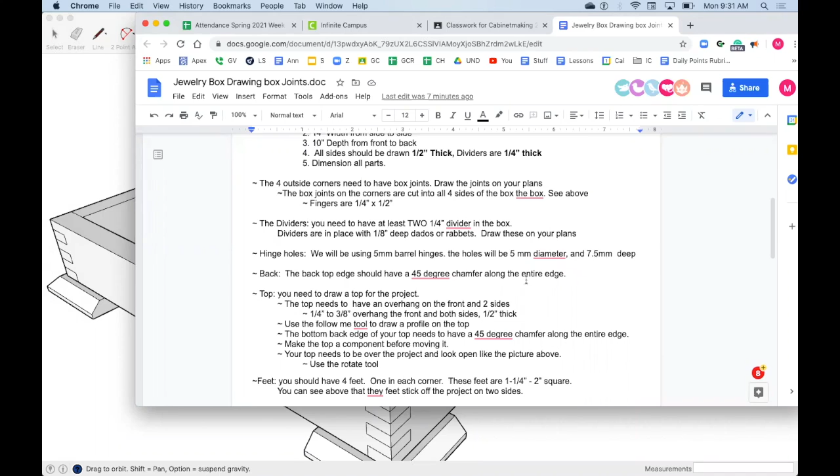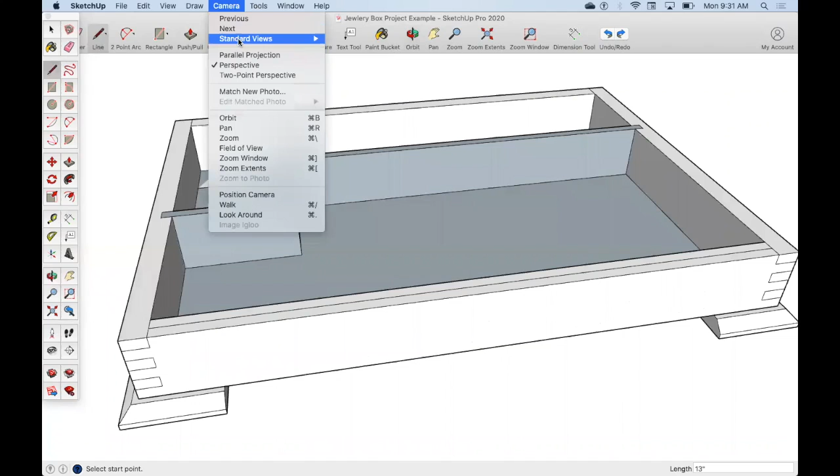So if we take a look at our box, we're going to decide where we want to draw. I've decided this is going to be my back. To start with, I'm just going to take a line across here to find center. Then I'm going to come in here right above, and you can go to camera standard view, that might help you out. I'm going to click top, and move over so I can see this here.

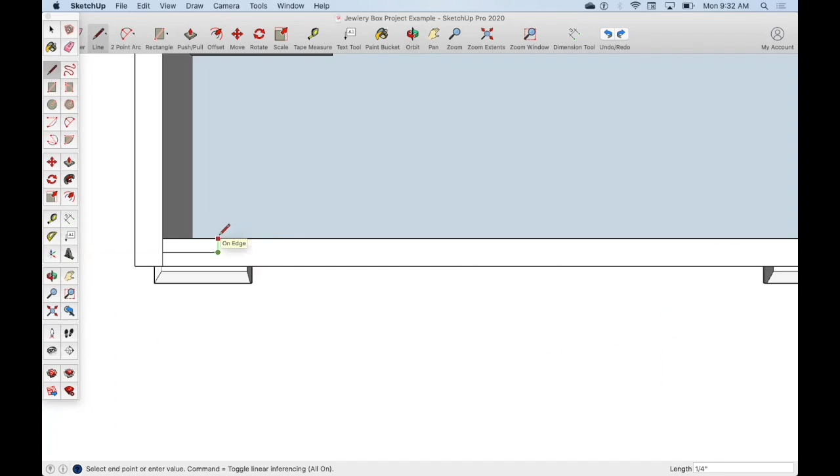Now, depending on where your dividers are, if you have a divider in the way, you'll want to move your hinge holes accordingly. So it doesn't matter how far. I'm going to come over 1 inch from that inside edge. And then I'm going to come up all the way to the edge there. So this is going to be the center of my hole.

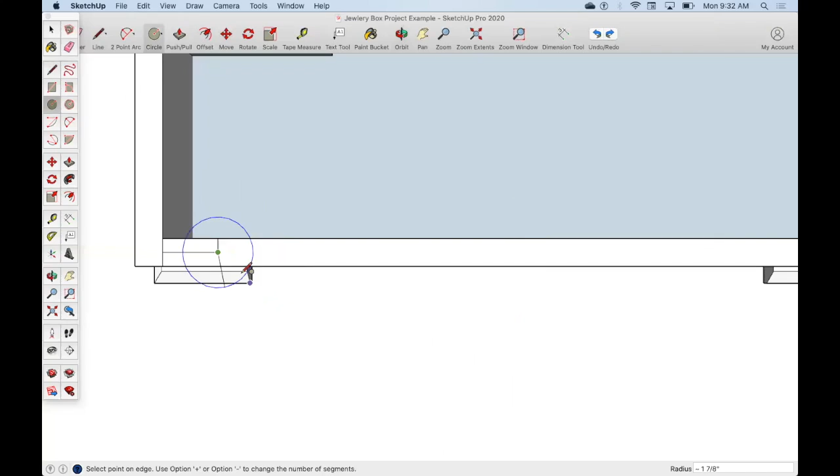Now I can come up to the top. Mine says rectangle right now. I'm going to make it say circle with that little arrow circle. As I got my circle tool, I'm going to click here. Now if I look down here in the bottom, it's telling me the radius. So if I'm going for a diameter, I got the radius right here, I'm going to have to put half of it. So I'm going to go 2.5 millimeter. Enter. That is going to be my hinge hole.

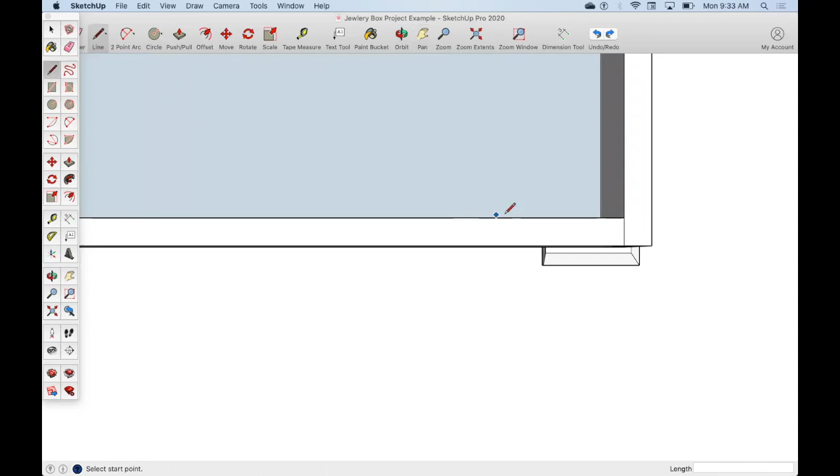Now I can erase these lines that I used for setup, and I can come to the other side and do the same thing. I'm going to come over from the center line over 1 inch and then just up to the side. I'm going to take the circle tool in the top or on the tray over here, and I'm going to draw a radius of 2.5 mm. And there that is. I'm going to erase my lines I don't need.

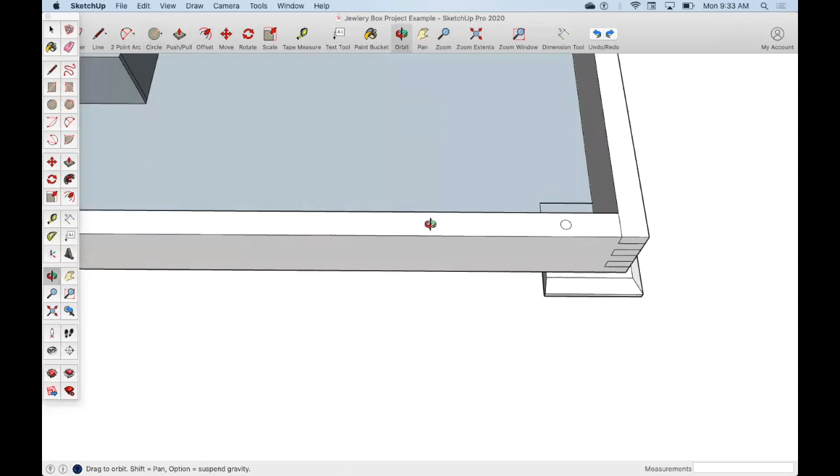And now I can tilt this down, and I'm going to push those down with the push-pull tool. And if you remember from the paper, it said 7.5 millimeters. So I'm going to pull it down 7.5 mm and enter. I'm going to come to the other side and do the same thing. Push-pull down 7.5 mm. Enter. All right, so that's my hinge holes.

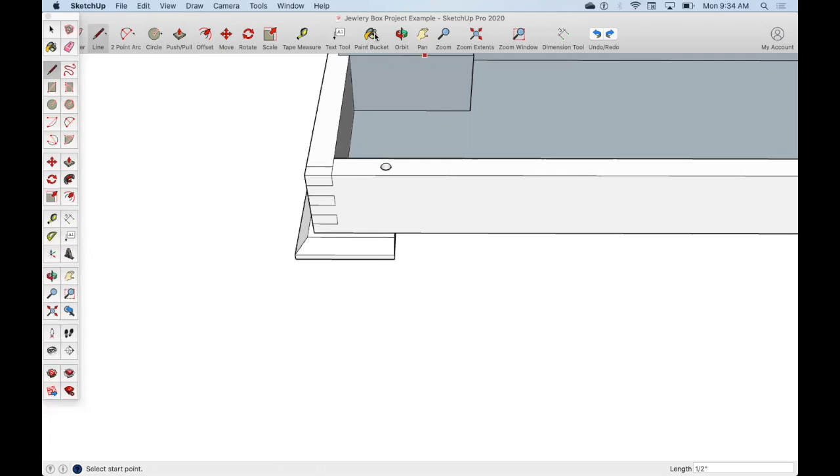Now what I'm going to do is I'm going to transfer this line, my center point, over to the edge because I need to know where that center point is. Now what I'm going to do, that should be 1/4 inch because that's a 1/2 inch thick. I'm going to come down 1/4 again, which should be right there at that notch because those were 1/4. And I'm going to click those lines together.

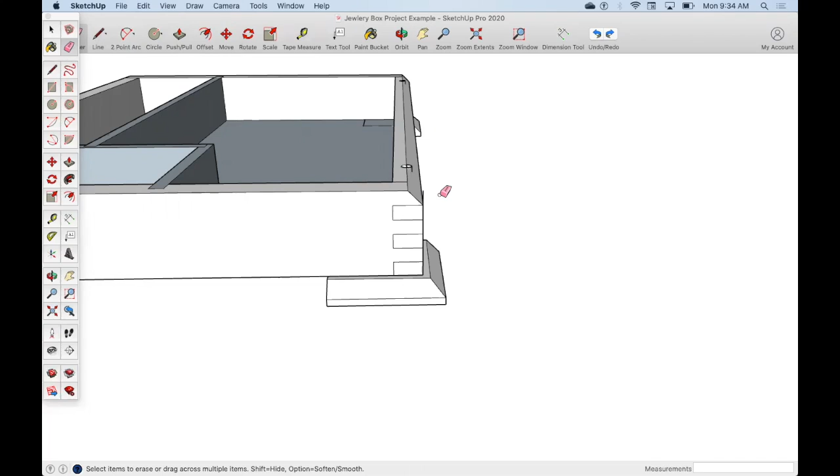And just like on our trim that we did, we're going to have to use the push-pull tool. And so I'm going to use my push-pull tool. Not push-pull, I'm going to use my follow me tool. Follow me. And I'm going to click, and I'm going to pull that all the way across to the other side. And that eliminates that back edge. Now this will allow the trim, or the top, to flip open for us.

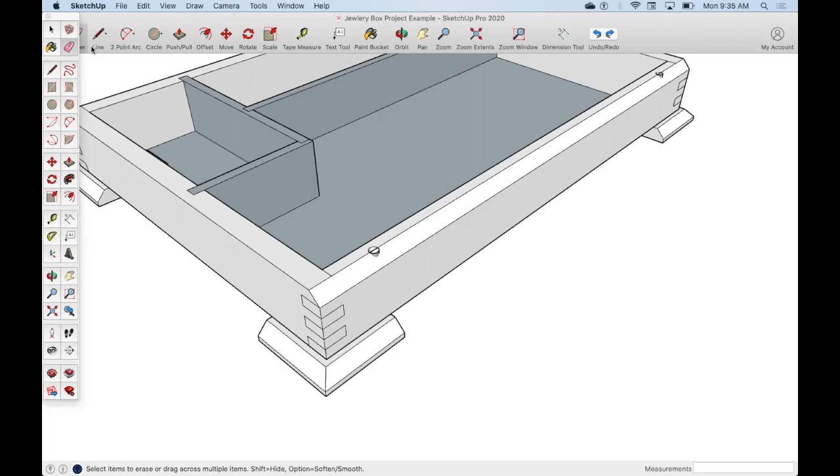And so if we orbit this around, you might see just a little bit of that hole there. That's fine. We can get rid of this center line in the hole. Maybe it won't let us. It's not letting us because there's a line there. That's okay, we'll just leave it like that. We've got the 45-degree chamfer or bevel on the back side, and we've got the holes drawn in place.

So that's pretty much all we need to do for the box side to get ready for the hinges. Now what we're going to do is start working on the top.